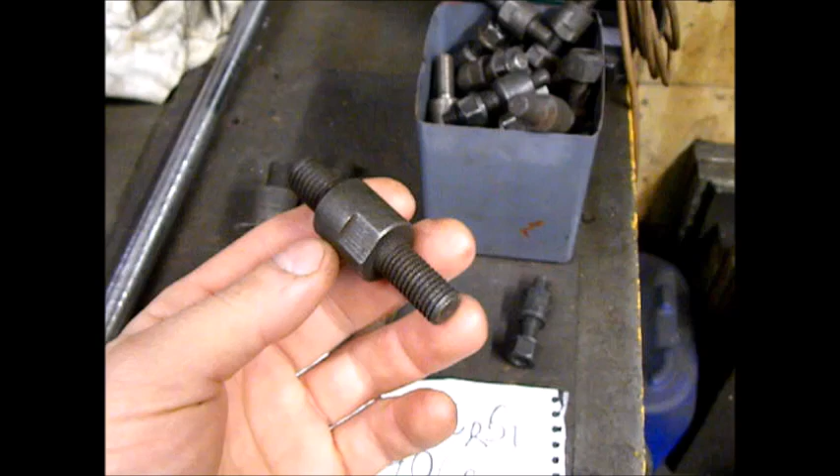Hello! And here is another day! Hello! I have one of the side projects. I want to build studs, something like this one.

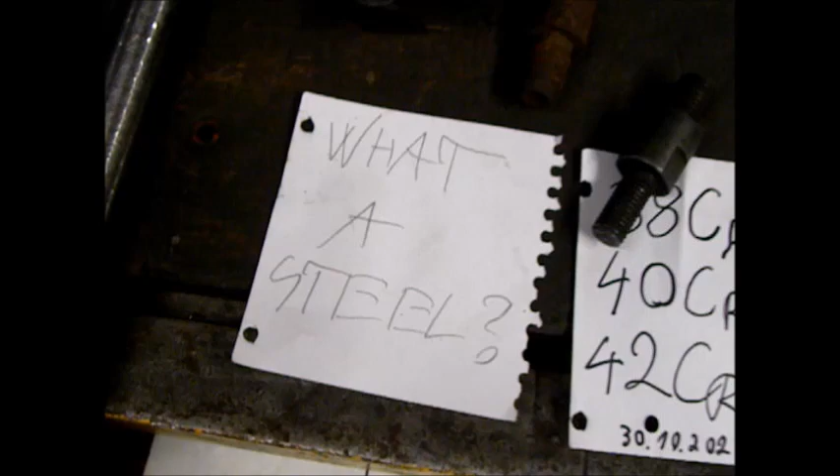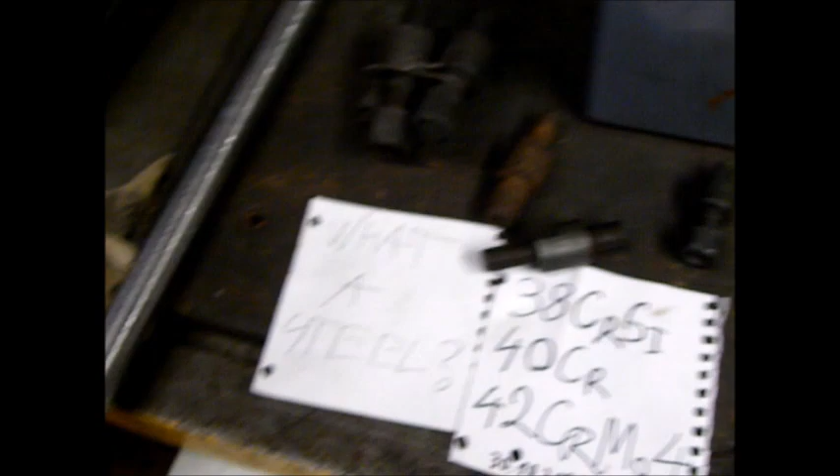I need 4 of them, and well, from what kind of steel are they made? I think they could be built from these kind of steels. Well, I found a piece of steel around this one. This was an old car half axle.

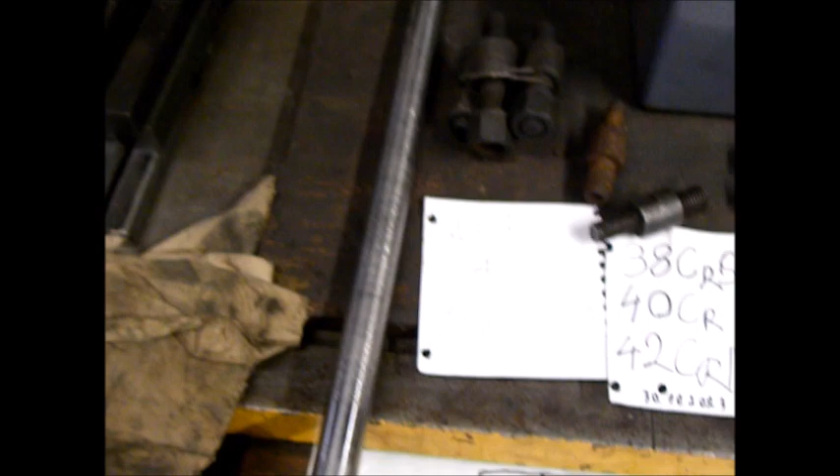But luckily I found already done pieces. Actually, what came from this, what I want to fix for another actions in my workshop. So now I can cancel this work because I have already parts. Woohoo!

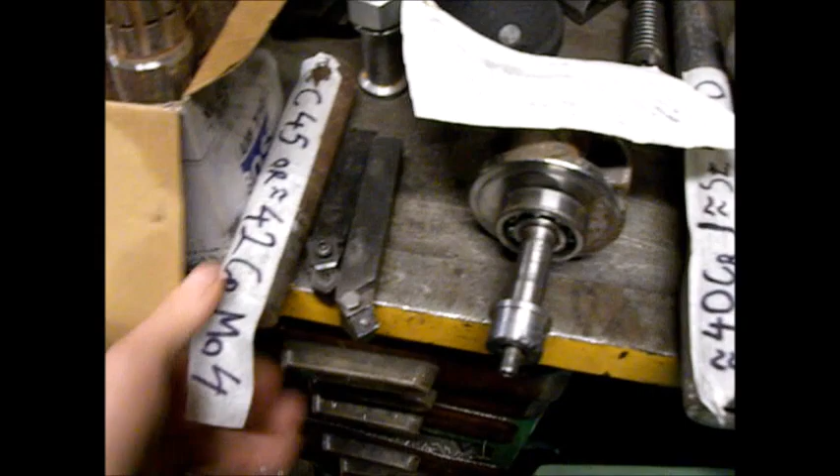Okay, let's warm up with these ones.

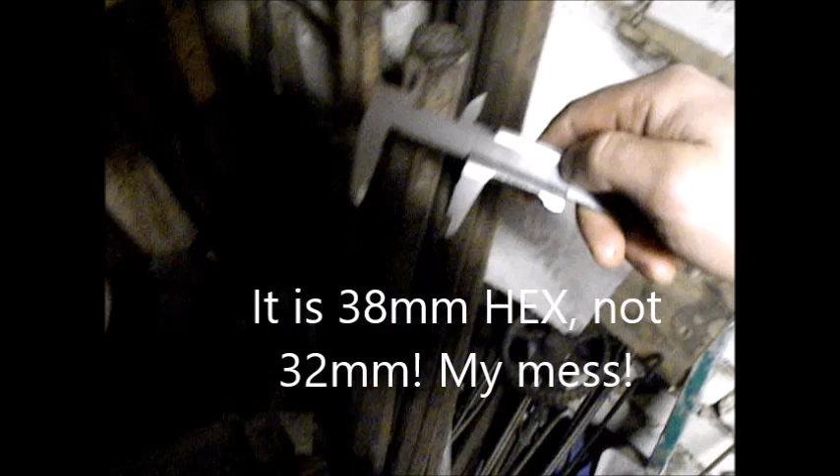$32. Okay, I take it.

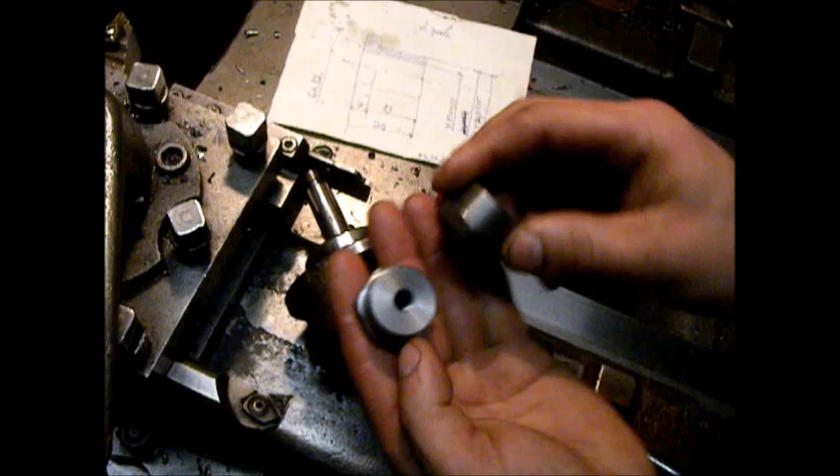Nice. I built two small parts for this project. Don't look on me, this is not my project.

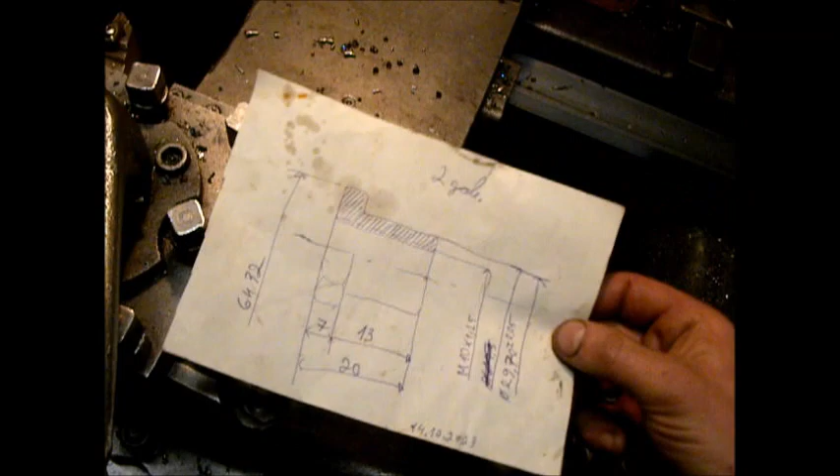Okay, it's done. And picture for this is such this. Okay, job is done.